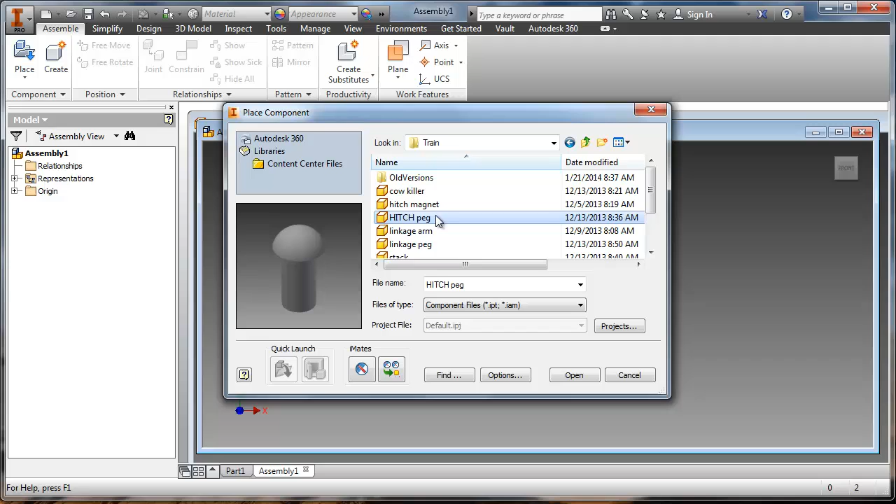I'm going to use as my example the train, but this will work for anything that you're working on. Usually the first thing I want to drop is the base, the thing that everything else is going to be attached to. In this case, I want to choose the train body. So I double click on the IPT file for the train body, and that brings it in. And with all of these files, I can bring in more than one of something. If you have a screw, you might need 10 of them, and then you can just keep clicking to drop more. If you only need that one, you can press escape.

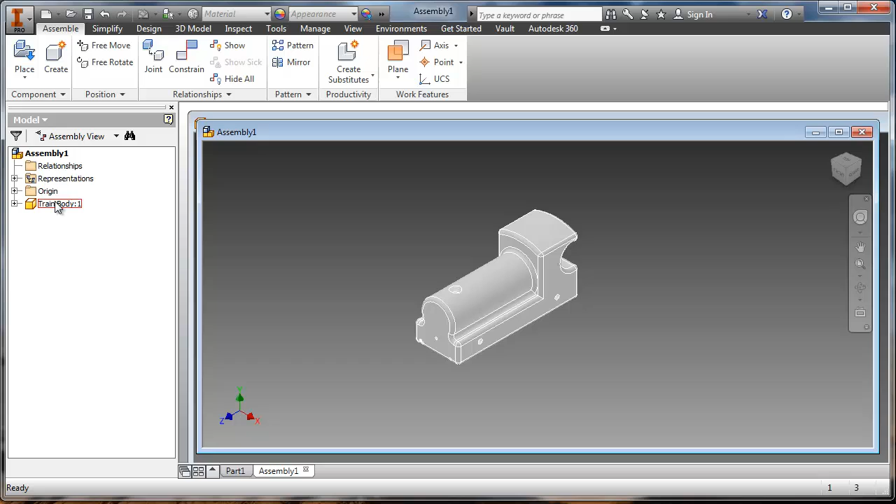Now, by default, this train body can still move around. I want to be able to lock that in place, and I can do that over here in the browser by right-clicking where it says train body and choosing grounded. Grounded will lock it, and you'll see the little pin there in the assembly. That lets you know that this file is now locked in there. Now I can bring in my other files.

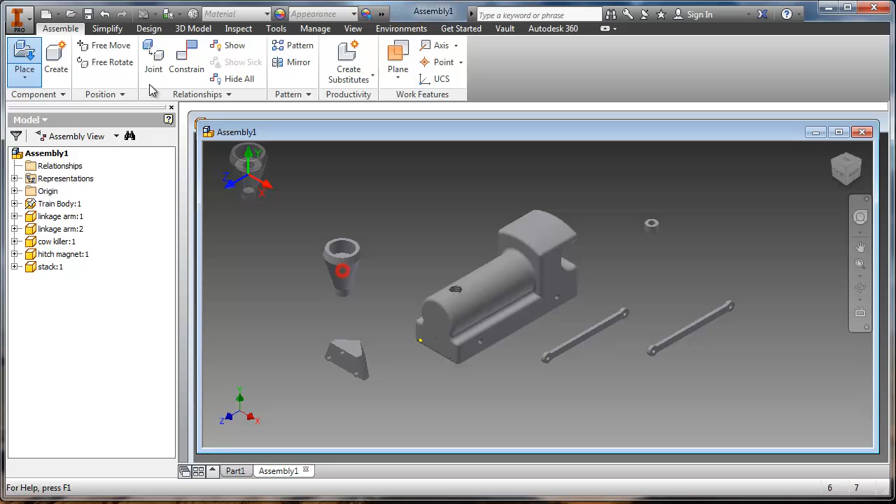So I'll come to place, and I'll choose, let's say, the linkage arm. I know I need 2 of those, so I can just click twice, come up to place again. Cow killer, I need 1. Hitch magnet, there's 1 of those, and I'm just placing them wherever for now because I can put them together later. And I'll do 4 wheels, and that should be enough for now. I'll bring in the linkage peg. I'll need 4 of those as well. So once you have all those pieces, then you're ready for the next part. Let me expand this out a little bit.

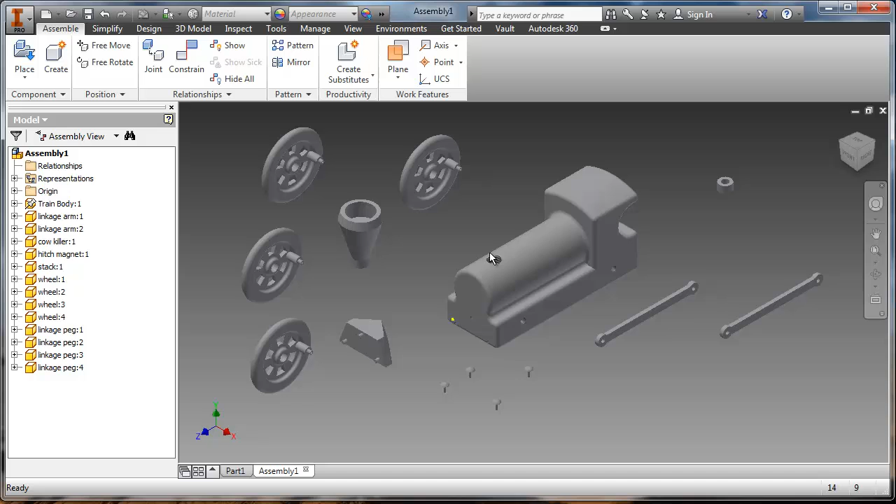When 2 objects are round, like with this wheel, I have this hole and this hole that are meant to line up because then the screw will screw in there and keep those together. And when that's the case, it becomes really easy to put things together. We're always doing a constraint, which is up here. C is the quick key for it. If you press C on your keyboard, this will also pop it up. But constraints are the way that we tell 2 objects to stick together. And if you have those round holes that you need to line up, that's actually the easiest one. That's right here, your 4th option, which is called insert.

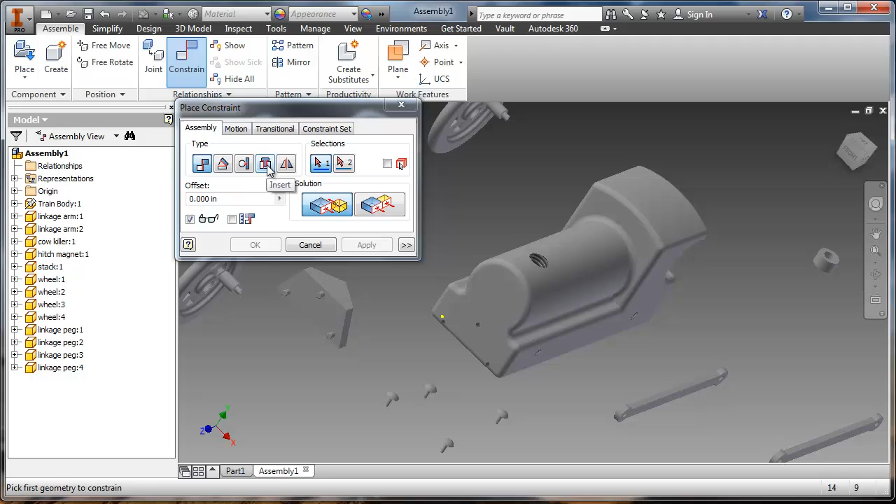So I'll click on that, and you'll notice it'll only highlight the holes. I'm going to click on the outside of that hole. Now I want to click on the hole in the wheel that's going to line up and be even or flush with that initial hole that I clicked. So if I click the front of this one, that's not going to work. That's going to put the wheel on backwards. So I'm going to cancel that and do it again correctly here for you.

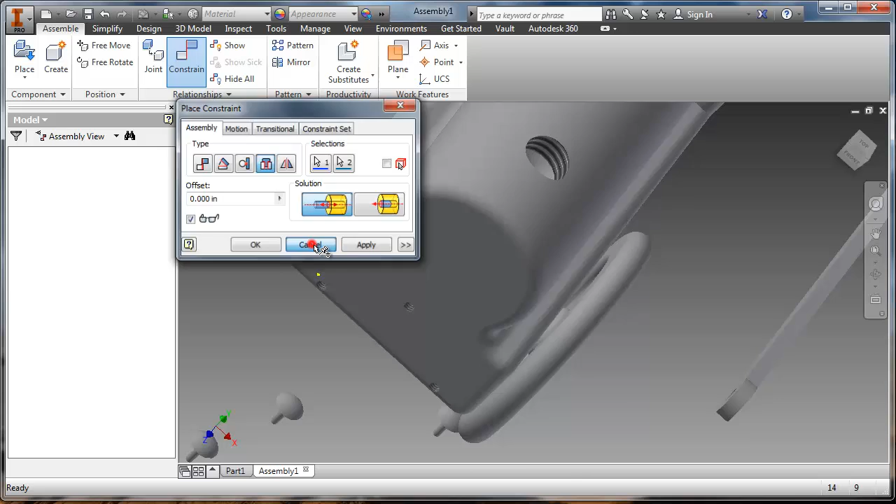Choose the insert option again. Choose hole, and then on the back, that's the one that I want to choose, because if I pick both of those, then that is where they will line up. When I click apply now, that one is in place, and with the insert, you should still be able to revolve around that center axis with any part.

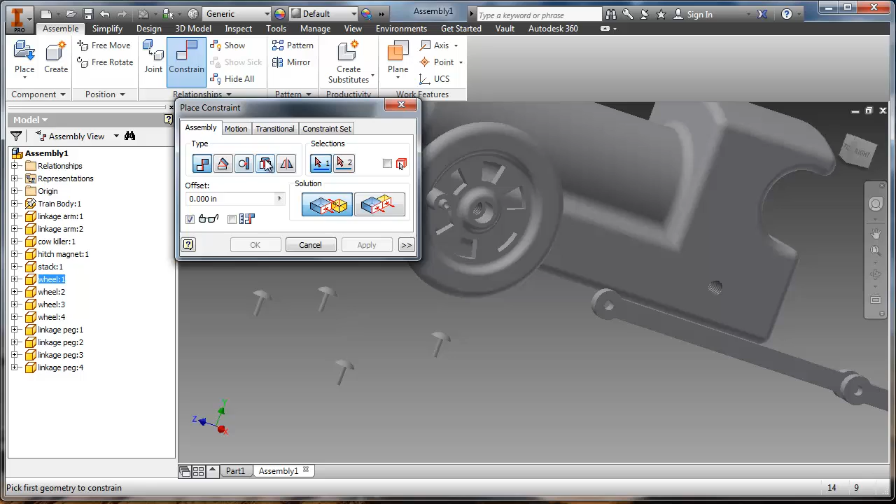So let's keep going through with this. I'm going to choose insert again, pick that one, and choose that wheel, apply it. Now that I have those 2, let's pick the linkage arm.

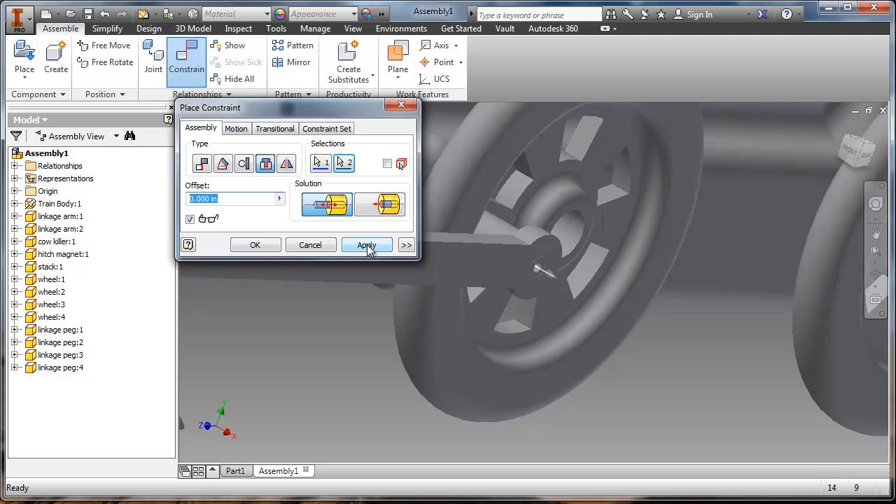So I'm going to choose that one, and then I don't want it to be on the front. I want the back of this hole to be lined up with the back right here. So depending on where you click, it's going to change. Now sometimes you'll need to move something around too. So after you click apply, you can hit cancel and move this around again.

And so now I can say, all right, so I need to insert again. I want to choose there and that one, and apply. And part of the simulation aspect of this program is when I have one moving, I should be able to then see how it'll move both of those pieces.

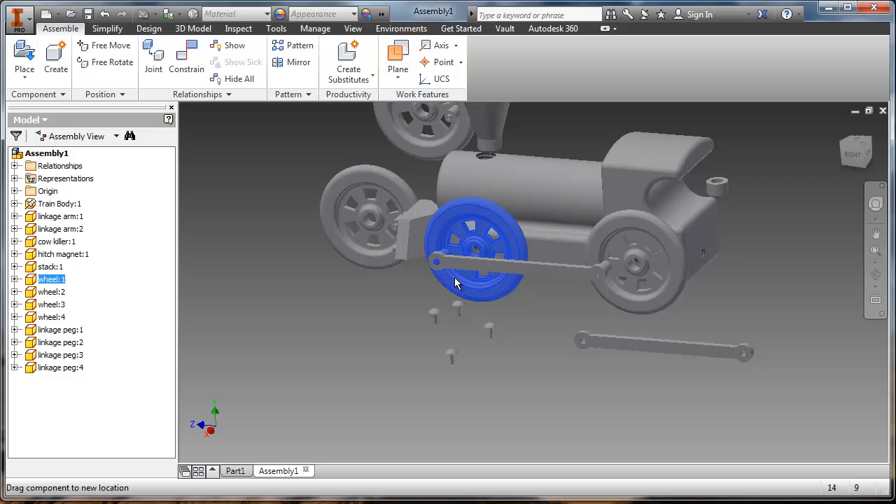Now if I do a constraint that I don't like, let's say I do this one and I put it here, let's say, and I apply it, and I realize later, oh, that's not right. What I need to do is find that over in the browser, and if I select any of these, you'll see that they highlight in the browser, and when I hit the plus sign next to them, insert is one of those options. I can right click on any constraint that I've made and delete it, and then it'll no longer apply.

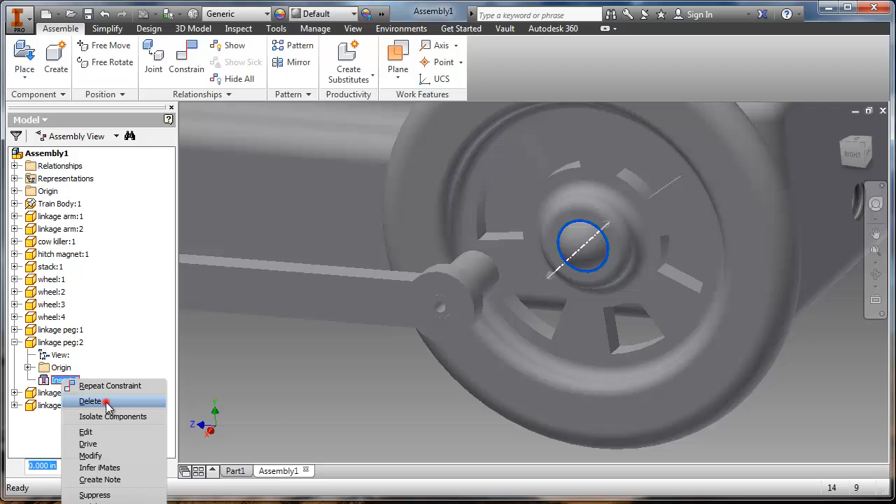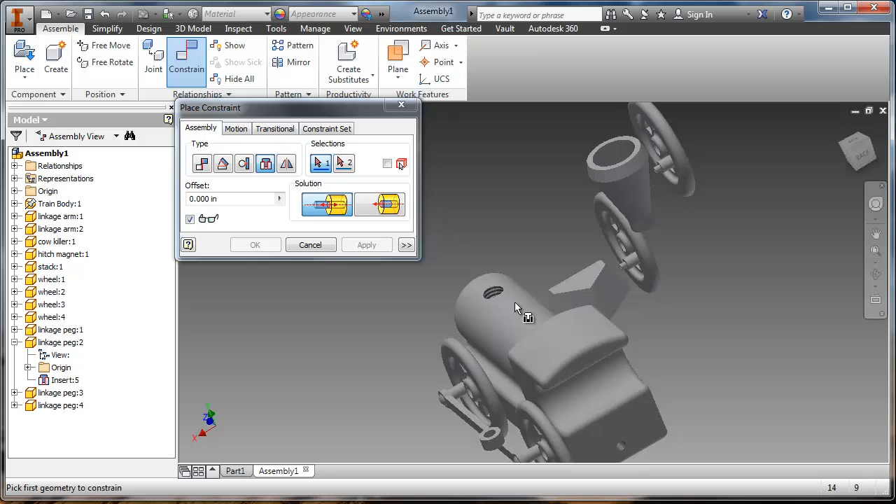And so now I can come back here, hit C for constrain, choose my insert option again, and say I want the inside bottom of that linkage peg to fit right there. And if I get going fast enough, I can actually do this fairly quickly. Let's do the top here. I want the bottom of that smokestack to be at the bottom of that hole that we've created for it.

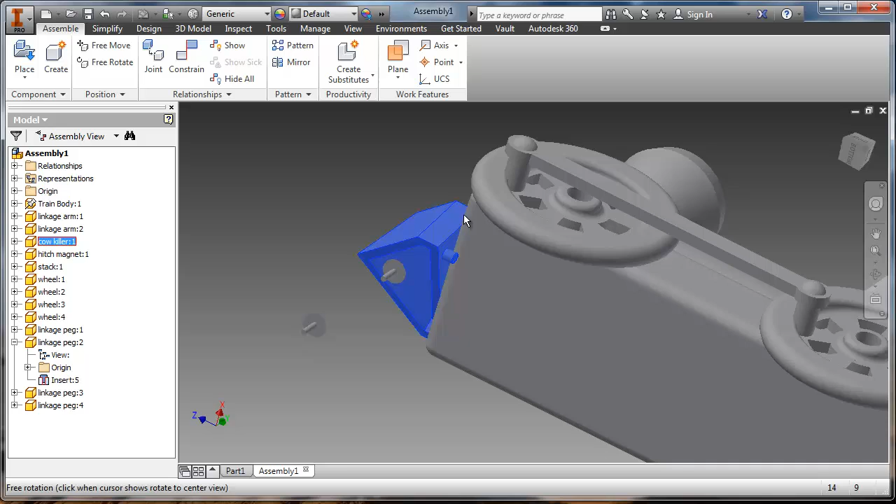I'm going to do the front to this, and then I'll apply it and hit cancel so I can move this around and adjust it. With this one, I need at least 2 different places where it's connected to keep it from rotating around. So I'll say that that peg should go in that hole.

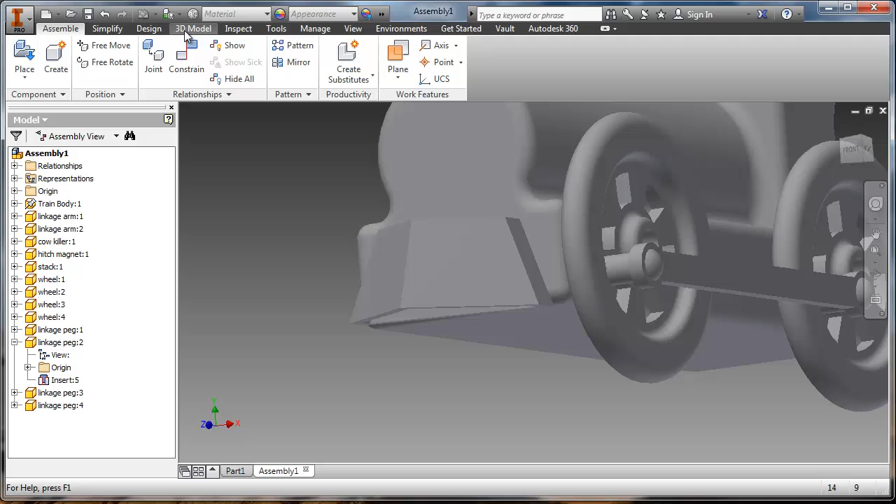And if you ever get a problem like this, that's because you've made a dimension that's wrong somewhere. So with this one, either the cow catcher could be wrong, or the train body itself can be wrong. One way you can test that is if you come here to view, you can change the visual style to wireframe and see where they line up. And it looks like, yeah, they're not quite there. In which case, change it back to shaded. I'm going to have to either adjust the train or the cow catcher.

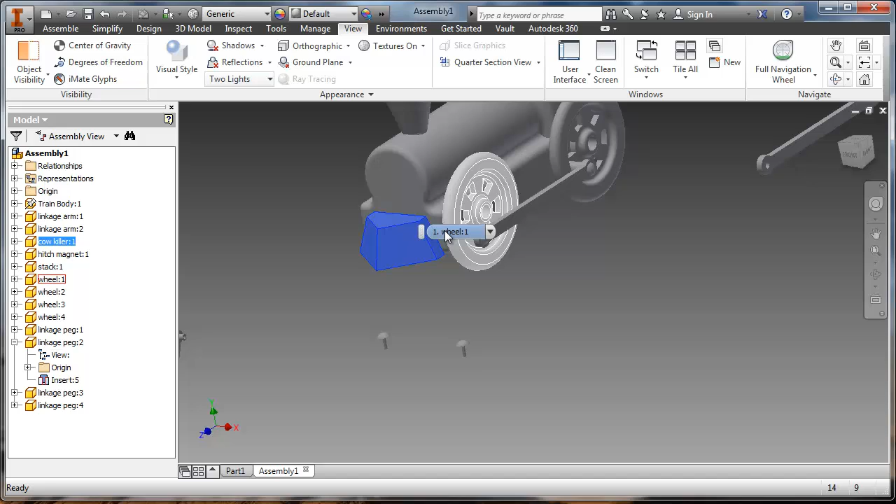So one of the things that you'll notice is making sure that your dimensions are correct isn't just something you do for a grade, but it'll actually make your life easier. And if I need to adjust either of these, I can double click on them, and that brings me into the standard part file for them, or I can just go to File, Open that specific part and work in there as well. But as long as I'm double clicked and everything else is invisible, this is just like the part. So I now have all of my options in here.

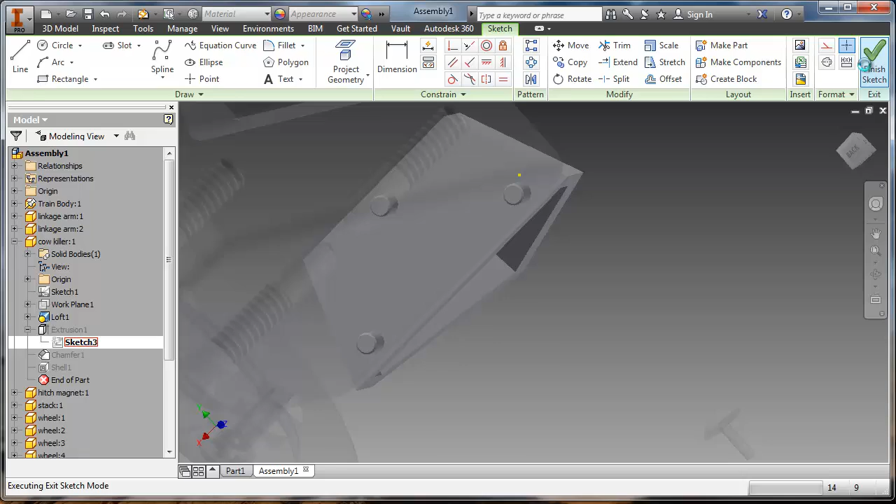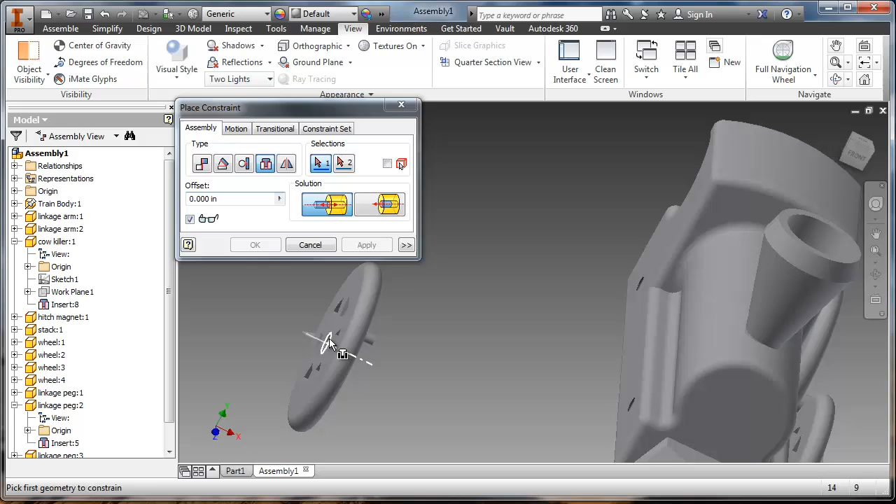I could come back here and adjust these measurements, find out which one is wrong. Once I've fixed it, I can click return up here in the top right hand corner, and it'll take me back to the assembly. So I can still work on individual part files even in the assembly. The eventual end result, what I want is when I press F6, I get that isometric view, and I want an assembled whatever my product is in that isometric so that we can use that for further projects.

And then I can keep working through this, keep using that insert. There's another video tutorial that talks about how if you don't have 2 holes that line up, like with the puzzle block, sometimes you have to match edges to each other, and there's another tutorial about that as well.